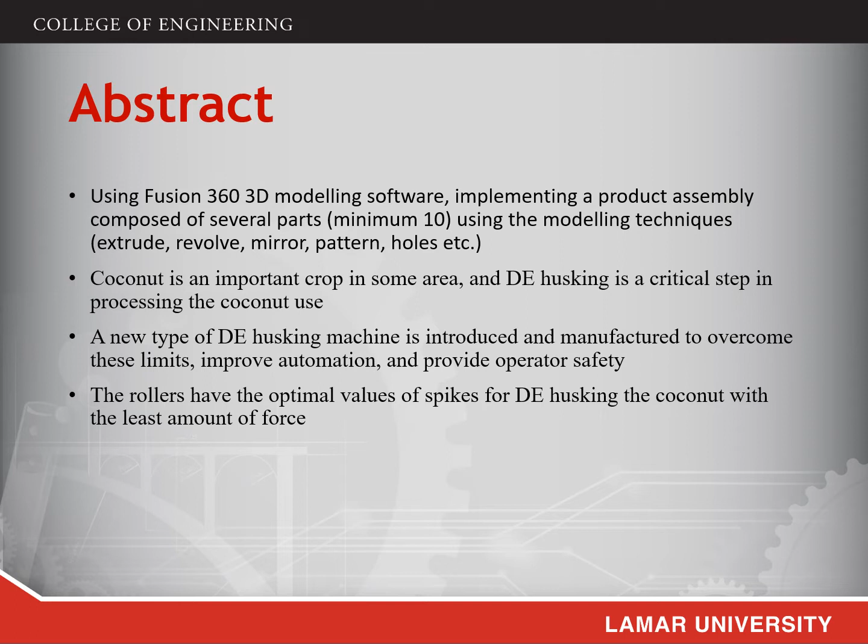The objective of our project is to redesign the coconut dehusker with simple design changes in the frame, and the rollers, decrease overall material used in the manufacturing, reduce the number of parts required for modeling, and develop the CNC code of a developed part in the whole system.

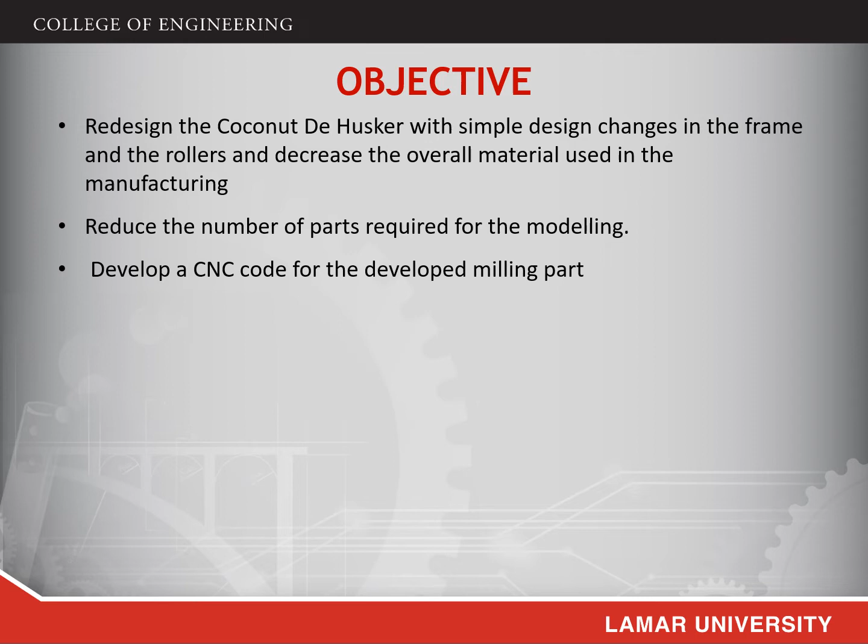In the introduction to our project, the dehusker machine is usually a mechanical control dehusking device known as spiked rollers. This dehusking machine peels the coconut husk. To obtain the dehusked coconut, a gear, belt, and sprocket transmission system must be used in the delivery of power from the motor to the cylindrical rollers with spikes, which cause the coconut to get stuck in them, and the revolving motion takes off the peel.

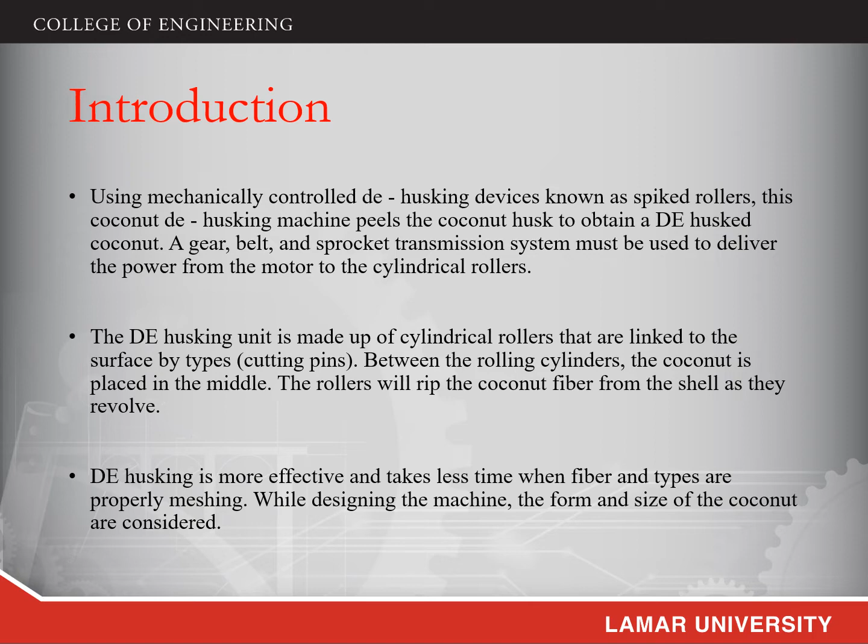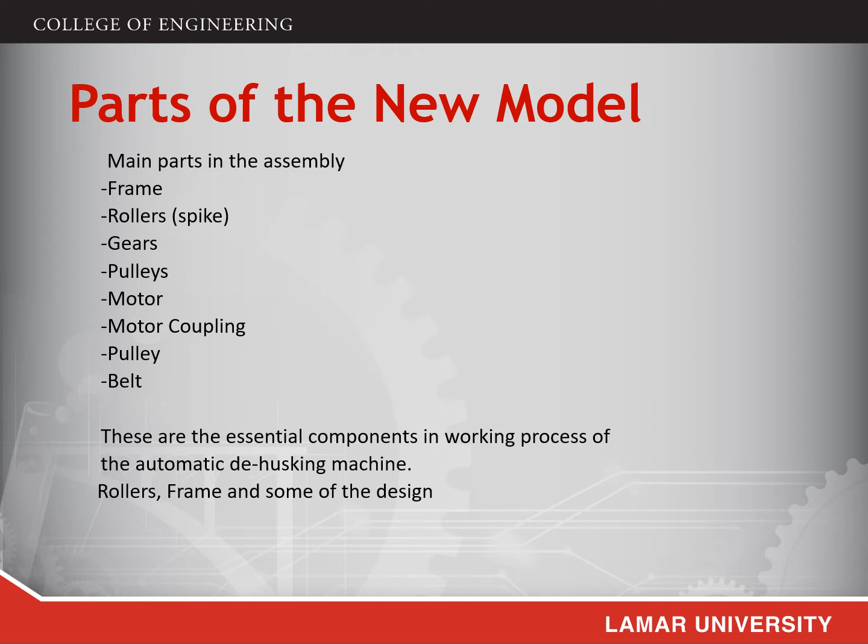Here are the parts of our model. The main parts are the frame, the rollers with spikes, the gears, the pulley, the motor coupling, and the pulley belt. These are the essential components which we used to redesign the coconut dehusking machine.

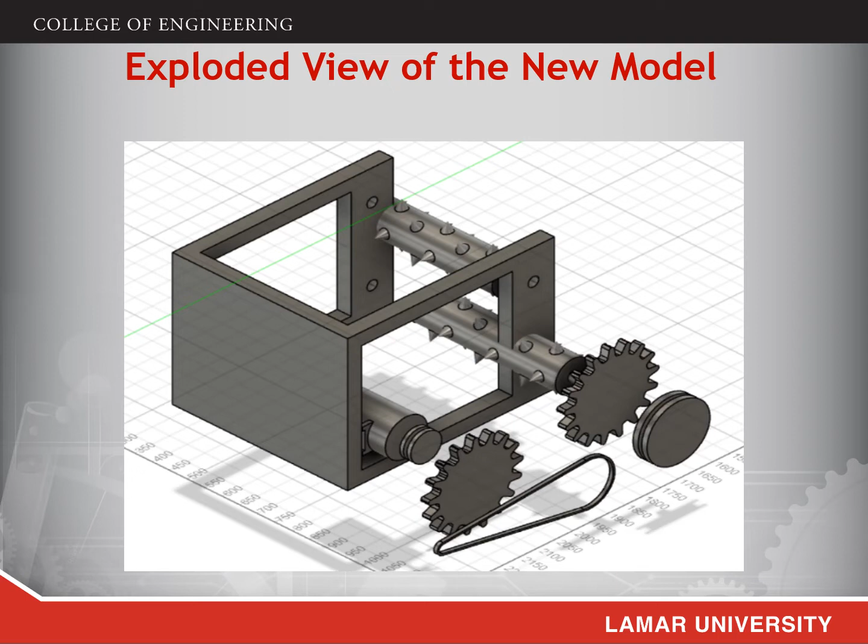Hello, Professor. My name is Aditya, and here you can see the exploded view of the new model, which consists of a frame, two rollers with spikes, and a small motor, accompanied by a gear connected to the other gear, which has a pulley and a belt.

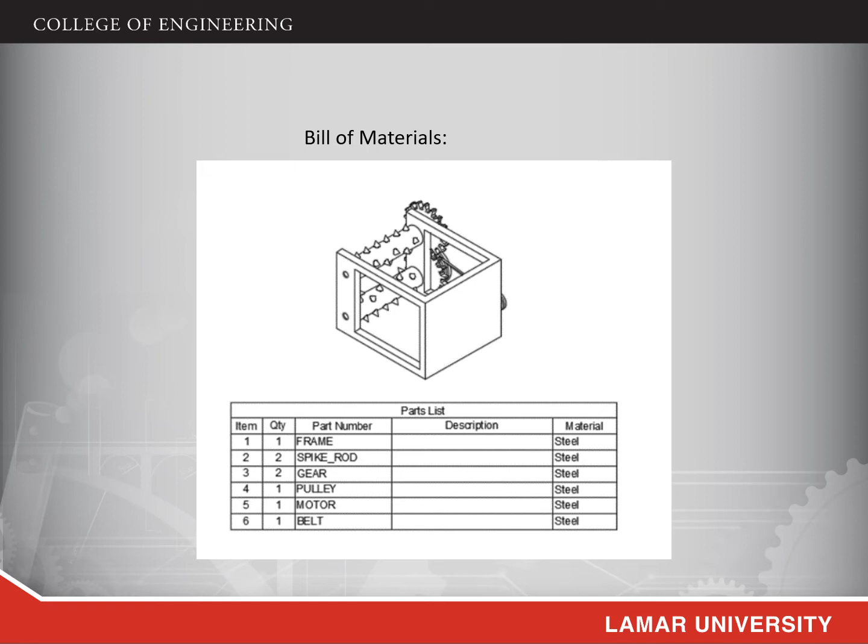Coming to the bill of materials of this model, it has one steel frame, two spike rollers of steel rods, two gear systems, one pulley, a motor and a belt.

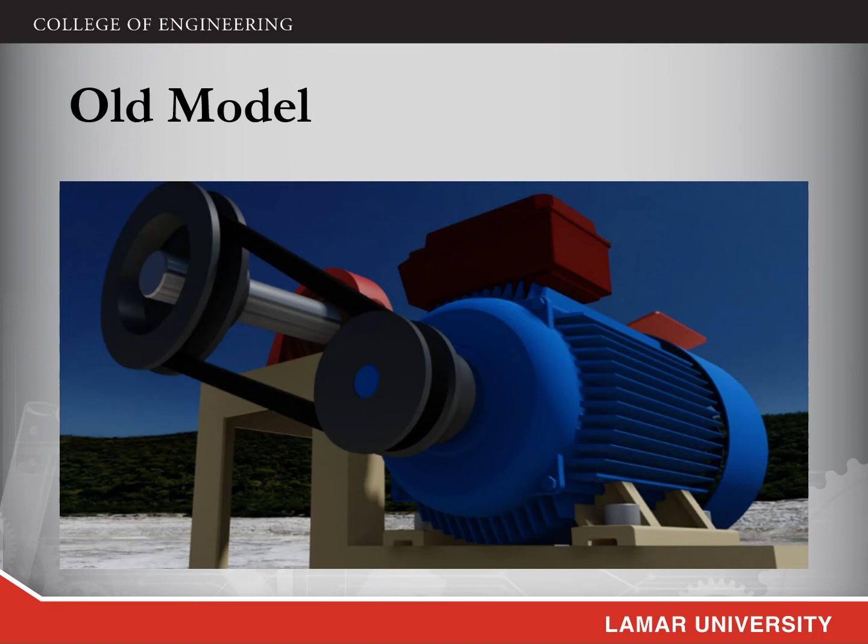This is somewhat complex, so we have planned and designed something new, which has a simple frame, motor alignment, and pulley alignment. In addition to that, we have added the spikes to the rollers, which makes the design very simple.

And with the concept of DFM, design for manufacturability, also sometimes known as design for manufacturing. DFM is the general engineering art of designing products in such a way that they are easy to manufacture. The basic idea exists in almost all engineering disciplines, but of course the details differ widely depending on the manufacturing technology. The design practice not only focuses on the design aspect of the part, but also on the producibility.

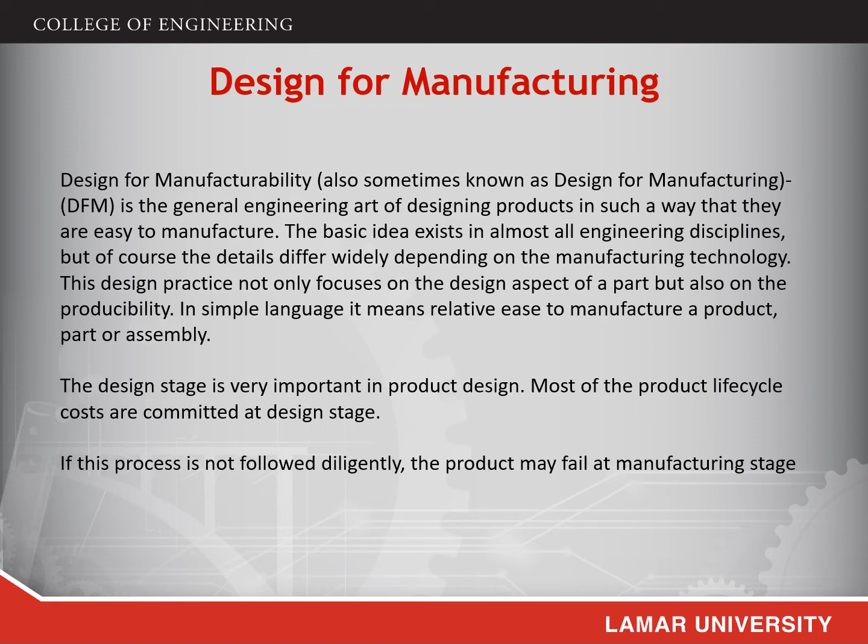In simple language, it means relative ease to manufacture a product, part or assembly. The design stage is very important in product design. Most of the product lifecycle costs are committed at the design stage. If this process is not followed diligently, the product may fail at manufacturing stage.

And in this project, we have the areas of improvement. In the original product, the frame is a little bit complex to do something for the DFM. Therefore, we considered how we can reduce the parts pattern that needs to manufacture the complex part without compromising the features of the product. We also considered in our modified or proposed product how we can manufacture different parts easily.

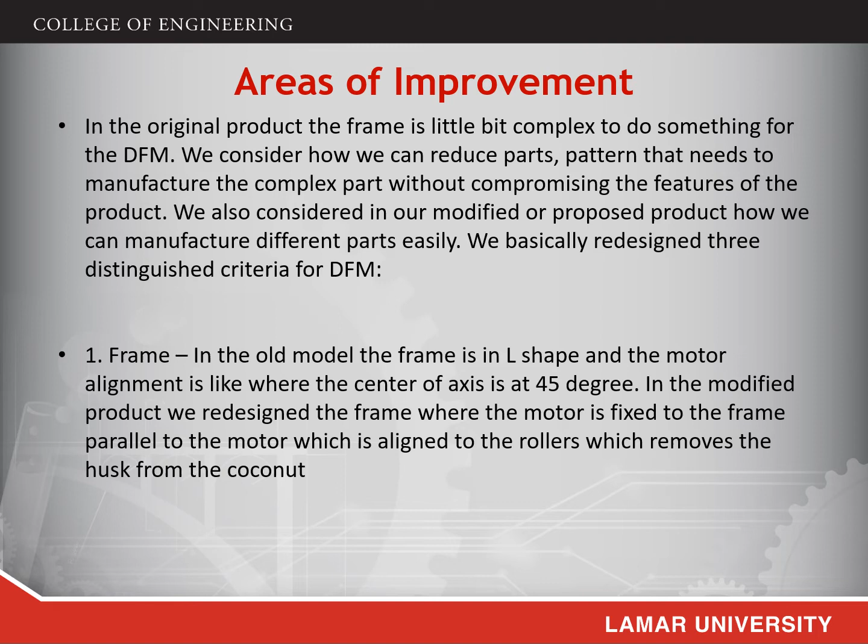We basically redesigned three distinguished criteria for the DFM. The first one is the frame, the next one is the rollers, and the third one is the belt and the motor. And in this frame, the design is very simple, which is U-shaped, which has two square slots and four screw slots. And we can insert the two rollers into the two slots, which has four holes. And to those rollers, we can add the pulley, which comprises of a belt.

And coming to the rollers, we added some spikes to the rollers, so the material is reduced comparatively. That's how we made some modifications to our rollers with spikes, which was done by giving the concentration for DFM. Belt and the motor. The width of the belt is gradually reduced with respect to the motor size. In the old design, there are a lot of features which we found while drawing.

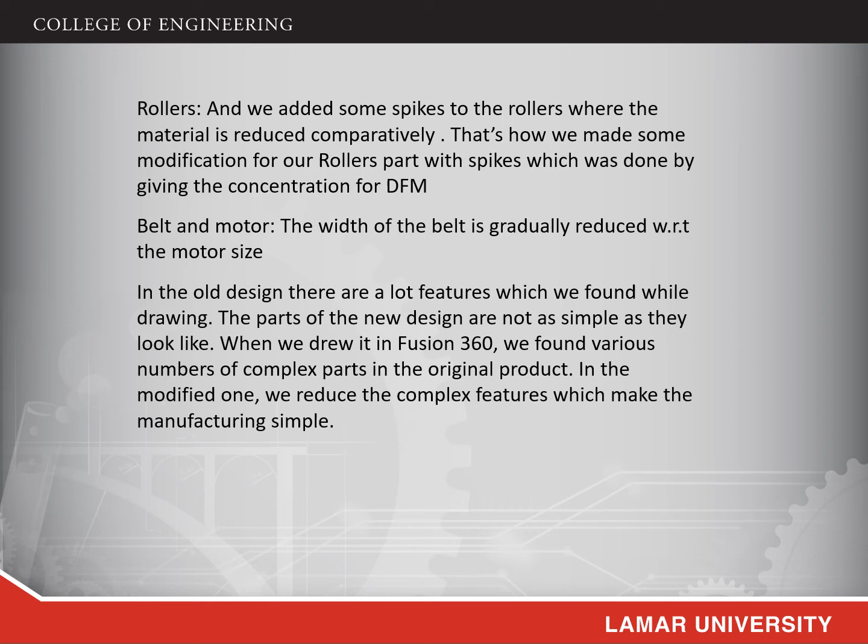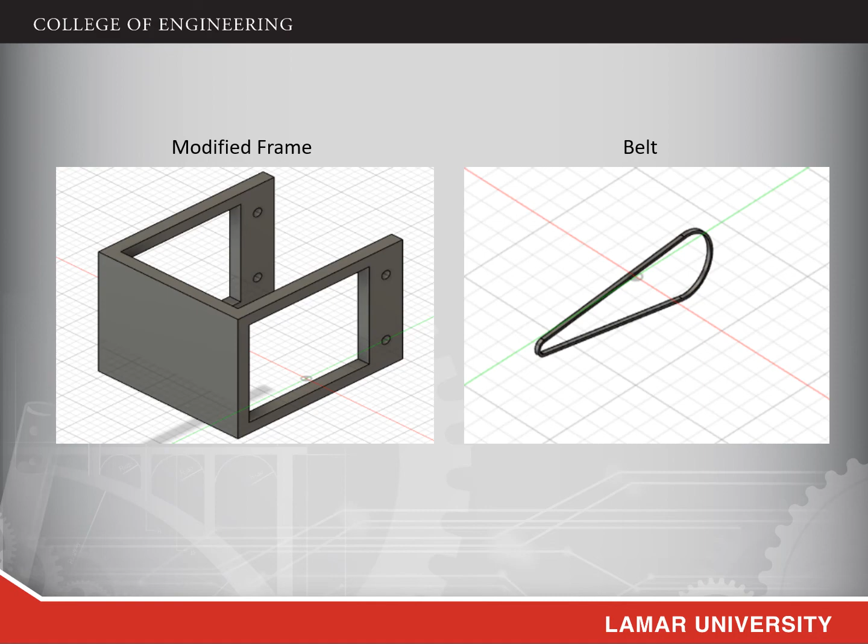The parts of the new design are not as simple as they look. When we drew it in Fusion 360, we found various number of complex parts in the original product. In the modified one, we reduced the complex features, which makes the manufacturing simple. This is the modified frame, belt, and we can see there are four slots to keep the two rollers with spikes and the pulley with the belt.

Coming to the DFA concept, design for assembly concept, this is a process by which products are designed with ease of assembly. If a product contains fewer parts, it will take less time to assemble, thereby reducing the assembly cost. In addition, if the parts are provided with features which make it easier to move, orient, and insert them, this will also reduce the assembly time and assembly cost.

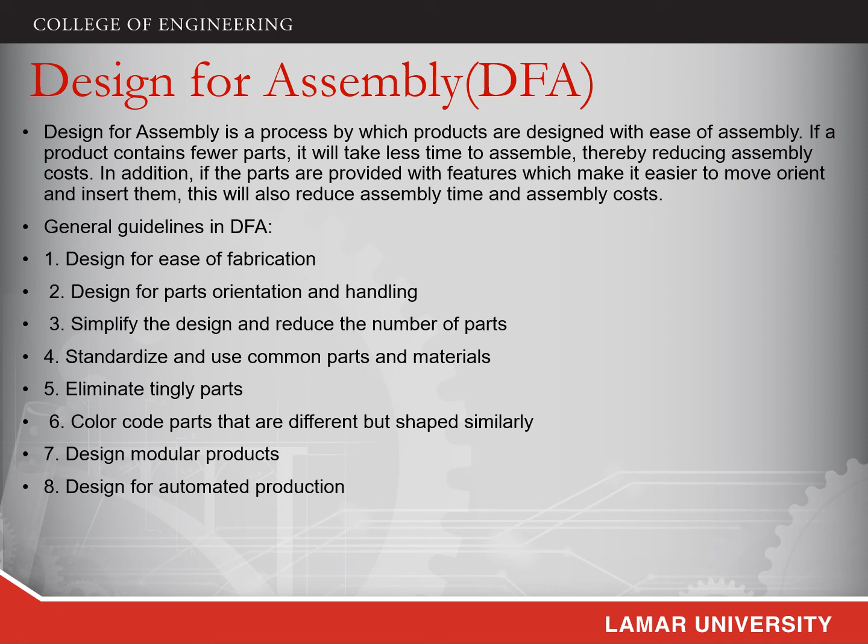And in the project, there are general guidelines in the DFA. The first one is the design for ease of fabrication. The next one is the design for parts orientation and handling. Simplify the design and reduce the number of parts. Standardize and use common parts and materials. Eliminating tingly parts. Color code parts that are different but shaped similarly. Design modular products. Design for automated production.

And in this project, we have a result which is based on the criteria, original model, and the modified model. And coming to the criteria, the first one is the type of parts. In the original model, we have nine types of parts, but in the modified model, we only have 6 types of parts. The total number of parts in the original model is 15 and 9 in the modified model.

And the manufacturing is complex in the original model, but easy in the modified model. The assembly is also complex in the original model, whereas it is easy in the modified. And the operational complexity is less in the modified model, whereas it is actually complex in the original model.

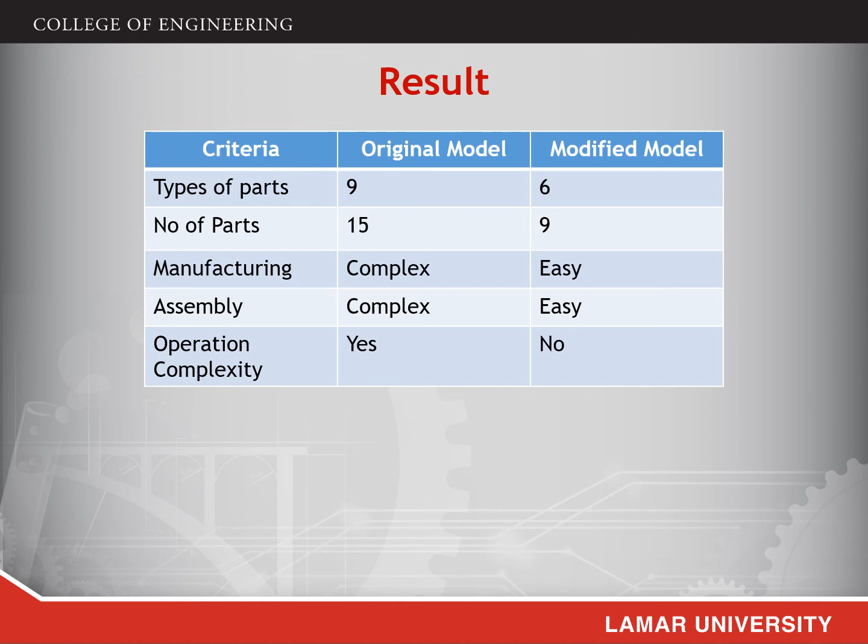Conclusion of this project. In the end of the project, we can conclude that the modified model clearly satisfies the target of the project without violating the main purpose of the product. DFM and DFA are implemented brilliantly in the proposed design, which in some portion improved the functional design, though it was not our goal. Moreover, some more modification could be done in future.